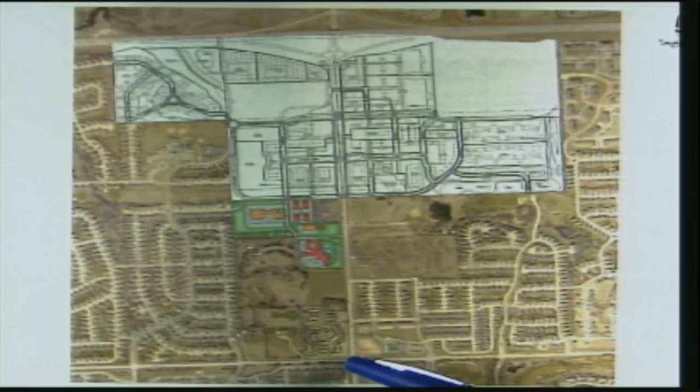Afternoon, Jason Thielen, E&A Consulting Group, 10909 Mill Valley, Suite 100, here on behalf of the applicant. Let's get our bearings here on this project. It's in between a couple major streets, Pacific and Dodge, Pacific being here, Dodge, 192nd Street being the arterial road that we are up against. This location here. If you're familiar with the Avenue 1 project, which is north of us, and which I'll continue to talk about, and then Pacific Renaissance, which is the 12-plex project that's been approved for quite some time on that location, and then the property in between.

And we'll get into all of that as we go through here. Just a little bit of background on this project, I think it's important to at least get you guys up to speed on the amount of time and effort we put in with adjacent property owners as well as with staff and a couple groups looking at this.

I've been working on this project since December of '16 to this present time. We had a client that came in and had put the Nicely property under contract back early in '16. We started talking with them, working with them. Around February of '17, the All Holy Greek Orthodox Church came in and was working on a letter of intent on the Everett piece and asked us to represent them as well. Considering that both pieces are pretty much adjacent to each other, it made a lot of sense for both of those groups to come together.

So from about February on, at that point, we started working together as a group, meeting, talking about the project, trying to make sure everybody's interests were represented. March 2nd of '17, we had our first pre-application meeting with the city and city staff and talked about the project, went back with their input, and started working together as a group.

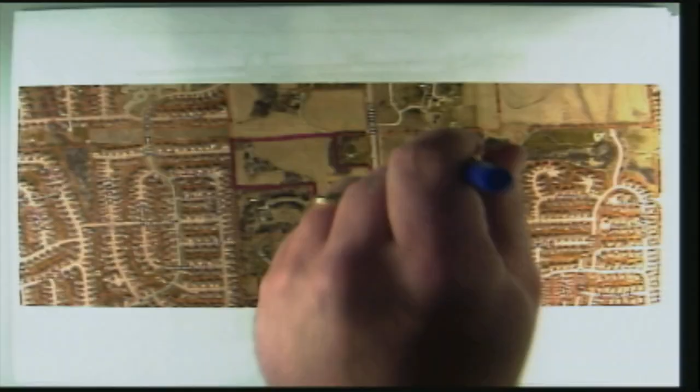The Baker property here, we have been in contact with them. It was since sold. We actually tried to purchase that property three times and were told it was not for sale. We've also talked with Mr. Kurt Hofer, not only a representative of Avenue 1, but also because we have to bring sanitary sewer across his property, so he's in the loop from that standpoint.

We had a neighborhood meeting February 21st of '18, and it was a good meeting. There weren't a lot of neighbors there. There was one representative from the Fire Ridge Homeowners Association, which is here. We continued to talk with him and are working with that neighborhood as well.

So as you can see, a lot of work over a year's worth of work, a lot of constituents, a lot of stakeholders we've been working with at the time to get us to this point where we are today. So we'll get into a little bit of the details of this project.

It's a 21-acre project located at the northwest corner of Gray Plume and 192nd Street. It's a 4-lot preliminary plat, and we're asking for a change of zone from agriculture to DR, R5, and then R6 PUD, which I think you're all familiar with as we bring in higher-density type projects for apartments. There are use permits that go along with this project as well, and I'll talk about those.

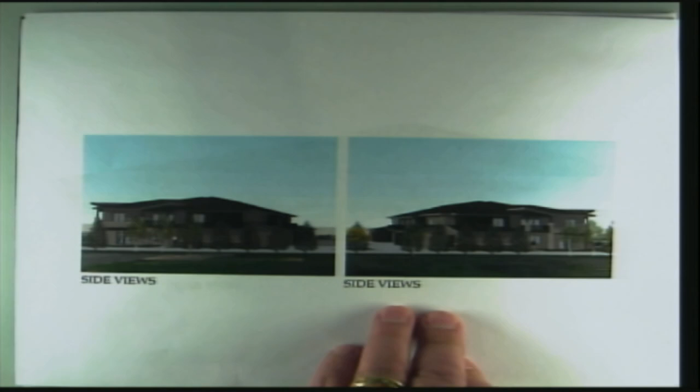The R6 PUD, which is being laid over in the rec report and we're fine with, is at this location here, but I thought I'd at least show you. Those will be 36 units of market rate apartments, 4 nine-plexes. It's a 2-story product with garage underneath. That's at least what's being planned right now. That will be the R6 PUD, so we'll have to meet all of the R5 and R6 site regulations for that project. There's a daycare on this site as well that we have shown.

That daycare is at this location here, 10,000 square feet, and we do have interest from a couple of daycare providers in that 8 to 10,000 square foot range. There's an idea of what this may look like and how that will go forward at that location. That is in the R5 district.

This other component of the project is assisted living and memory care at this location here, kind of south of this private road. I don't have any colored pictures of that, but we have 54 assisted living units at that location—that's the south building—and then there's a memory care component, which is 24 units. The memory care is single story, and the assisted living is a 2-story product. So again, fitting within the R5 zoning district. Memory care, assisted living at that location.

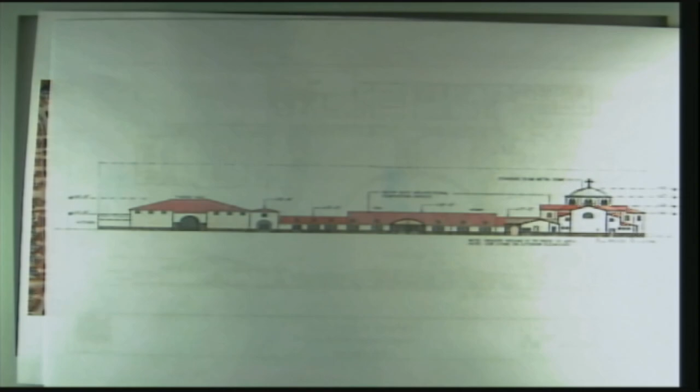And then we have the religious assembly use, which is a conditional use permit, at this location here—32,000 square feet of total building. They'll build it in a couple of phases. They'll build 24,000 square feet to begin with, consisting of the gathering area at this location. So that gives you an idea of the floor plan, what that looked like. This will be a large, open space entranceway into that. We're aware that we'll need to go forward and ask for a waiver to the height for the parapet and the cross, and we'll be prepared to do that as well.

Can I ask a quick question? Is the church going to operate all of these facilities? They will not—they'll operate the religious assembly, obviously, and they'll occupy this location. They do have this property under contract, and they're working with a couple of daycare providers. Okay, that's all, thanks.

I'll leave that one there.

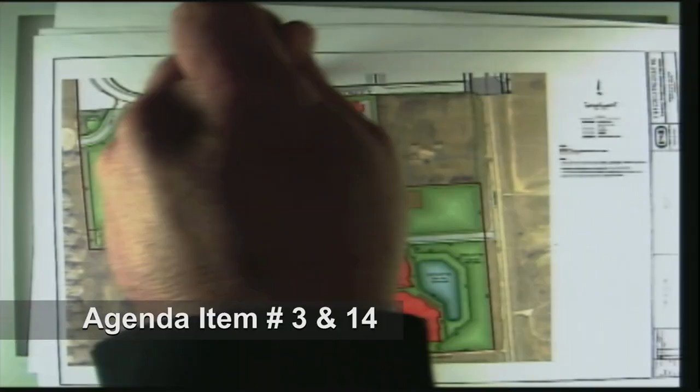So we'll talk about access a little bit. We are kind of fixed on a couple points. The Avenue 1 project has an approved preliminary plat, and this is the location their preliminary plat shows. I talked to Mr. Hofer, and they're not planning on moving that as of now, so we'll match up with whatever that location is. We'll probably be there before them, so I assume that's where that intersection will end up.

And then we have the right-in, right-out, future full movement intersection at 192nd Street, which is the eighth mile location. This road will come down through the project and then stop, as we do not own past that.

We're making a connection to Fire Ridge, which is Street B there. I know this is a concern of the neighborhood. When we met with them at the neighborhood meeting, from our standpoint, we are of the opinion that Harney does create a better access through. People can file out onto HWS Cleveland and use that collector to get locally. We understand why Public Works is requesting it, and we are indifferent from that standpoint on that access.

And then Gray Plume, which is this access here. This exhibit shows it's actually platted, and it actually belongs to Mr. Daly. So whenever this was platted into acreages, he created these fingers, which then became the private drive access point. There is an access easement over that piece of property. It's not shown on our plat because technically we do not own it. However, we do have rights to improve that piece of land if it is to be improved for public purposes. So we are working with Mr. Daly on that. We will have to pay fair market value for his property. It's not like we can take it. So we're working through that with him to get that all finalized as we move forward.

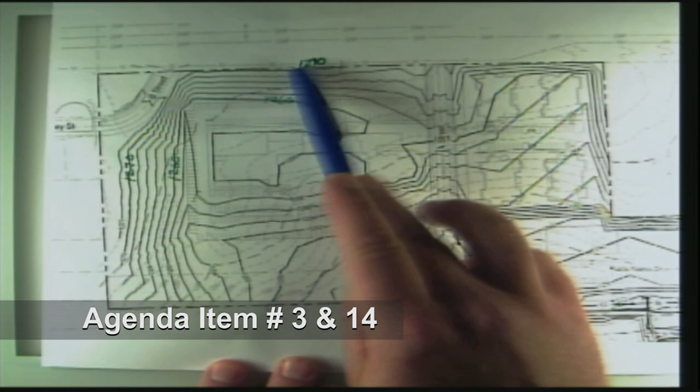We'll continue to work with Public Works on that. I talked about Gray Plume - the conditional use permit for the church talks about providing a sidewalk down from what will be Street B, coming through Fire Ridge down to the church there. As you can see, there's a tremendous amount of grade there - it's a 3-to-1 slope with over 10 feet of fall. Getting a sidewalk there is going to be really expensive, and it's kind of impractical considering what you have to do to get it down there. When Harney Street eventually comes in, they can come around down Street A at a reasonable grade. So we'd ask that not be a condition of approval for that.

We are in agreement with all the other conditions that staff has put out, and we'll continue to work with staff on those. We're consistent with your comp plan and your future land use plan. And with that, I'd be more than happy to answer any questions you have.

Thank you. Okay, are there any other proponents?

Thank you, Mr. Chair. Brent Beller, 11440 West Center Road, appearing on behalf of Jude and Alexis Beller. I have a site plan, but I don't know if it's the most current one.

The Bellers aren't opposed to this development. By and large, they've talked to the church, they've talked to Mr. Thielen, and they understand what's going on. Obviously, Jude's in the development business.

Just to reiterate, their parcel is 10 acres right here. That's their home, where they live. They have 5 kids, and I can tell you from experience, those 5 kids and their family take full use of all 10 acres. It's used as a family residence. With this development, I think they understand everything that's going on.

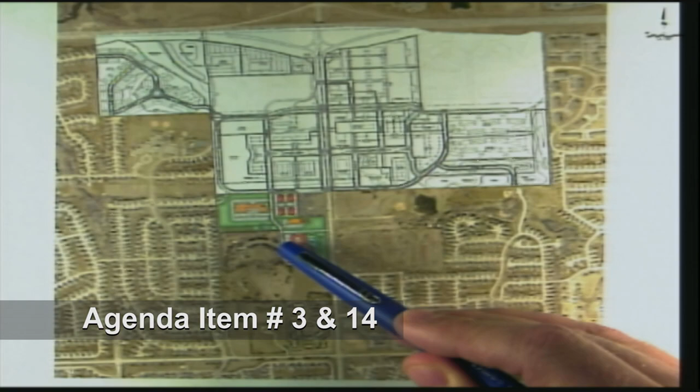The other thing to be mindful of, which is kind of hard to depict on this plan, is that what's been proposed is essentially 4 exit and entry points off of these properties. That's a lot. The thing I know Jason and Jude are talking about is how to handle that.

As they exit here, this is their only exit. If we're doing stuff down here, I think the idea is maybe to close this off, so we want further discussions about, I assume, the rerouting up there. It's those types of things that, as Jude and Alexis look at this from their residential standpoint, they want to make sure they have answers and that they're clear, because again, it's their house.

Now, being in the development business and real estate, they're also mindful of where they're situated in the city of Omaha. We know what's going on up at 192nd with Avenue 1, and that this property sits in an area that's going to be developed. They've accepted that perhaps the time has come that they need to sell their residence.

With that in mind, the second theory in all this, and the thing they want to make sure continues to be discussed, is that they don't want to do anything or agree to anything, especially regarding these entrances and exits onto that street, that would hamper their ability to develop their property. That just hasn't been explored yet. I know Jason has been working with his team to try to figure out solutions for how they can best go about that. To my knowledge, they haven't necessarily agreed on that.

I think there's been informal discussions with the church. Informally, they've agreed, absolutely, they'll work with them. But again, we're just here to put it on the record formally that we hope those discussions continue even after, assuming you all approve this, as we work towards city council. So with that, I'm happy to answer any questions, and we appreciate your time.

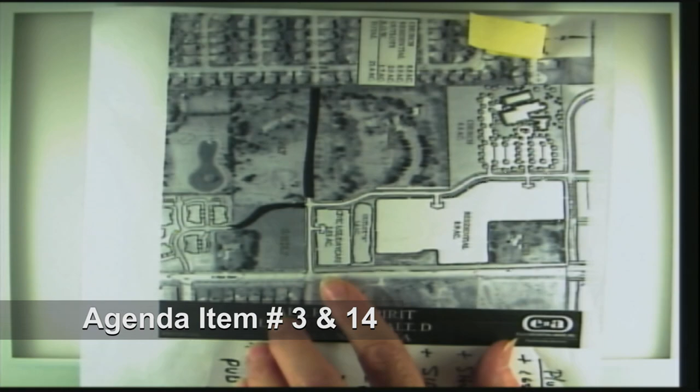So this here is the back end. Will it work if you turn that? Sure, or this way? Is that better? There you go, that's fine. Please help me. Thank you, you bet.

This is 190 - no, I turned it. 190, yeah, this one's right, 192nd Street. 192nd goes north and south. Okay.

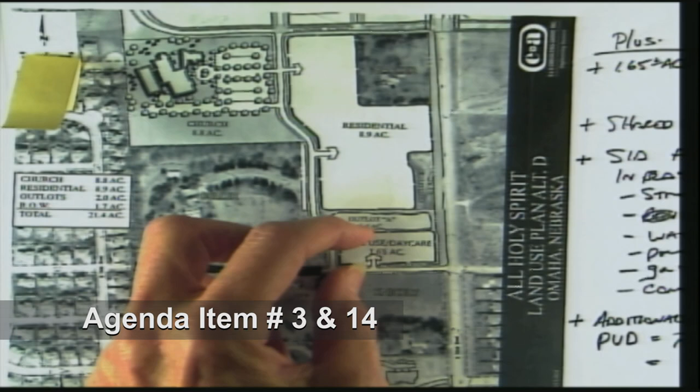Then this is actually the quarter-mile access of Leavenworth, which goes onto our property. As you can see, E&A suggested that we go straight through here, and that then we would have about an acre and a half or plus of extra land to the north of our property that would be sectioned off from the rest of our property. So we didn't know how we'd be able to use that. They suggested putting a daycare in there, and we thought, well, with that potential, maybe that would work for us.

But at that time, we weren't able to do anything. We didn't have any potential buyers. So then over the next several months, until about this past January, our resources changed, and it became apparent that we might have an opportunity to work with them again. So we contacted them in January and asked if we might be able to work together.

They were hesitant, and we pressed them. We said, can't you maybe just come up with some action points that we could address and maybe make this work so we could both get this development going. So we had a letter that shows some of our action points.

We were in discussion with them, and at one point we were submitting a potential site plan to the city planner's office, and they said, well, let's see what your site plan is, we want to know if it's going to meet our road needs. So we submitted it to them. That site plan was not approved, so we weren't able to move forward with that connection.

But in the process, we also asked them for their site plan. In their site plan, we assumed it was going to be similar to what they showed us before, where the church was up there and designated residential. They showed us nothing but the church. So at that time, we thought, oh, okay.

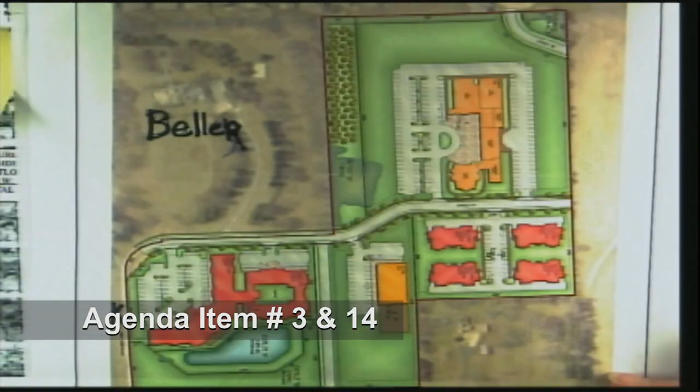Well, on February 13th, they invited us to a meeting, which they were required to do. They had submitted their plan to the city, which is now the plan that you are being presented. Do I have that in the right orientation? There you go. Okay, thank you.

And in that, it showed that they were now taking a daycare and an assisted living, which we had originally planned to put on our property, which would then carry the cost of infrastructure. When this was presented, we were a little bit in shock because we didn't realize that they were going to take those uses after having taken our assisted living people before. Apparently this was kind of their MO.

So we said, well, are you interested in working on a road development for the quarter mile? And they said, nope. Then they said, do you have any other questions? And we said, I guess not. So we walked away from that meeting. They proceeded to give us notice of other meetings that they had with this plan. We did not attend because we really didn't have anything else to add. Since we weren't going to be able to participate, I didn't want to do any cooperative deal, so we did not join in their conversation.

So at this point then, let me make sure I get the orientation right.

We have 6.7 acres, which becomes problematic for these smaller pieces, similar to the Bellers and the Dailies. When you have to carry the cost of infrastructure, it almost devalues your land. We have a 3,200 square foot ranch on 7 acres on 192nd Pacific, which is pretty valuable. So in order to improve that, we need a higher density or something that's going to carry the cost of that infrastructure in order to make the roads come through.

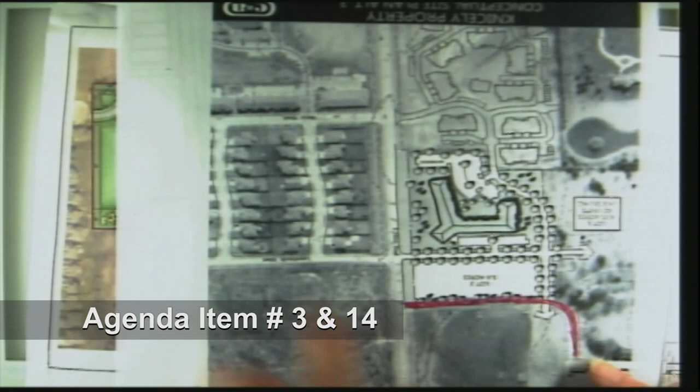So at this time, this was their plan. Again, I got to get this in the right orientation. No, yeah, so 190 here. Is this right? 190, oh, we want to go north. Yep, there you go, there we go.

So this was our assisted living and our 2 acres for potential daycare use, and the road, as they were suggesting, coming straight through. The other thing that's problematic is the Pacific Renaissance designed a road that came halfway through our property and did not connect to the Daily property, which they abut to. At that time, we didn't understand that was going to be a problem, and I was out of town at that meeting, so I didn't have a chance to ask why they don't just go ahead and connect there.

My contention is it's more cost effective if the two of us share the cost of the infrastructure with a shared road. So at this point, with the road coming through our property and then connecting to theirs, which is their proposition, we don't have shared cost and are unable to proceed with a development.

So in this case, if we're going to develop a property, this is the Knicely property, this is the Daly property, this is the Beller property, this is the Everett property. The Everett property is 20 plus acres, these are all 10-acre pieces, and ours is less than 10 acres. This is Grayfawn Avenue and 192nd Avenue, existing roads that the Everetts have an easement to that gives them the right to improve, and we actually don't have rights to that road.

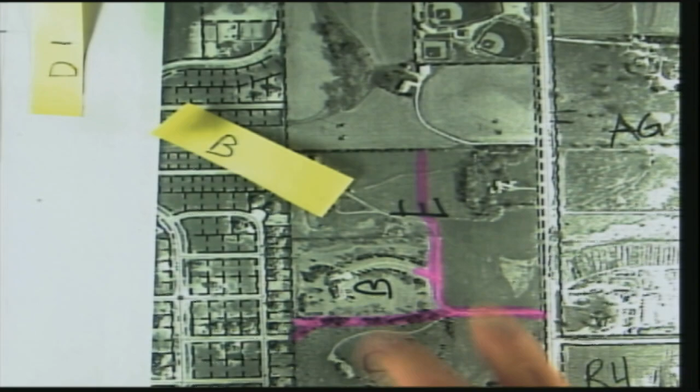It's a private road. So with that being a private road, my perspective is it makes more sense for these people to be able to improve, as the Bellers were saying, that they need a heavier use or somebody that's going to bring in water and sewer, as this demonstrates.

Get us going the right perspective. There you go, there we go. Can you guys see that? Okay, whoa, do left here. All right, this is how the land flows.

So the water runoff goes towards this direction, down to this detention pond that they're proposing, and also their wetlands. So for the Bellers and the Dalys to be able to connect to sewer and have storm drainage, they need to be coming this direction. So without the improvement of Grayfawn, these folks don't have opportunity to connect to sewer and water.

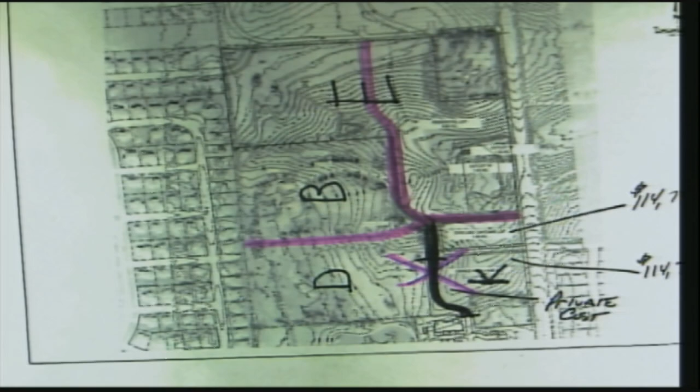The 8th mile connection that they're proposing is also a private road, so it does not carry the same weight of bringing in the infrastructure to this heavy use development. So the heavy use of this is a concern without having infrastructure. The fact that it blocks off the ability for Fire Ridge to access through a couple of points here, it would come through the Daly property.

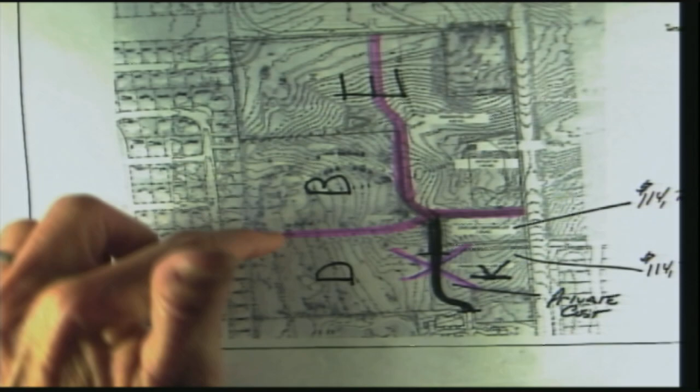My proposition would be that they would share a road between the Daly and the Bellers, whether they want to develop this year or 50 years from now. This is going to be a less expensive shared cost. But again, there needs to be water and sewer because you can't go uphill into Fire Ridge to connect to that.

I guess my concern today is that this hasn't been significantly addressed, the Grayfawn Road issue. I think that needs to be resolved before there's any approval on density, any changes to the conditional uses. I just don't think it's been addressed sufficiently to carry what needs to be done for future development in this area.

The issue of sidewalks and all of that related to these roads, none of that has been addressed. A buffer between their property and our property has not been addressed. When they said they didn't want to work with us anymore, we didn't feel like there was an opportunity for conversation, that they just kind of said, nope, we're done. The city's not going to require us to do anything else, so we're not going to.

So that's why we have a zoning board, because you folks have an ability to come in and see a vision bigger than what the city's committed to in municipal code and the master plan, and their hands are tied to some degree because of that. So if you want an exception to that, we have to appeal to you folks.

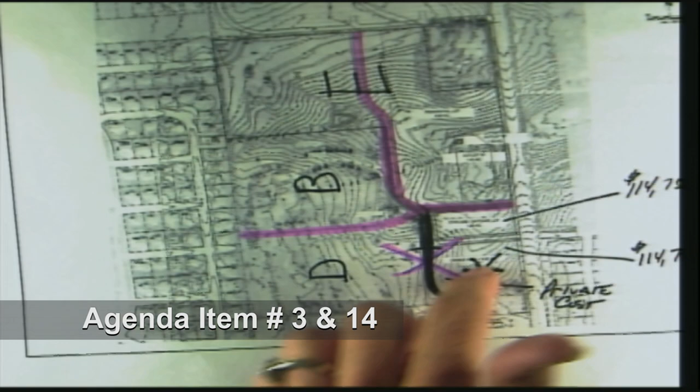One thing I recognize is Leavenworth is actually the quarter mile, and these two streets don't meet. I know there are several places in Omaha where they don't meet. It's not ideal, it's not the best, but if these people are improving and this doesn't get improved, you're leaving all these people hanging. I don't think that's a good plan for the overall development picture of that area.

I think that's all I've got. I appreciate your time, thank you for letting me speak today. Okay, thank you, Susan. Are there any other opponents?

Hello, my name's James Dean, 503 South 195th Street. I'm a resident in Fire Ridge and also on the Fire Ridge HOA board. Not sure exactly how this works. I'm also here with a fellow neighbor, Dan Hartman, who asked us to kind of combine, so.

Just looking at this property, James, do you want to give that a turn? Is that better? Okay, just to show you where my residence is right here. That backs up to the property, and Mr. Hartman's is right next to mine. We do have a tree row there. On this tree row, there's probably 10 to 12 large trees that are dead out of 30 or 40.

These have not been removed, have not been maintained over the years, and it's just become an area for trash to collect with the wind. It's actually on Mr. Everett's property, but it backs up to our yards. We have restrictions with our covenants on fencing, so even with fencing, it would just collect trash.

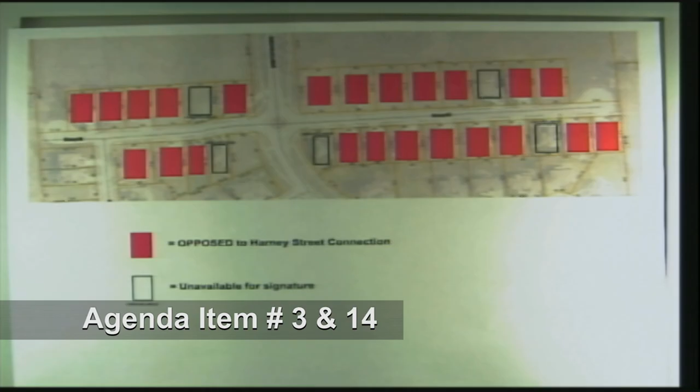The red boxes represent homeowners on Harney Street. The red shaded ones represent homeowners opposed to the Harney Street connection—again, not opposing what the church is doing, just opposing the Harney Street connection. Hopefully you received that letter. We also started a petition—I've got 2.5 pages of folks on Harney Street who signed opposing it. I submitted them to Mike.

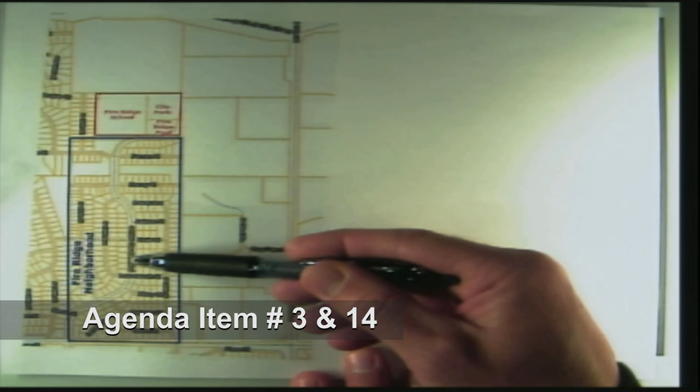Here's the blue box representing the Fire Ridge neighborhood. On the very north side you have the Fire Ridge School, a city park, and the Fire Ridge clubhouse with a pool, tennis courts, and basketball courts. Neighborhood pedestrian traffic follows HWS Boulevard to the north. Our concern is that adding more traffic to Harney Street will congest that—actually we feel it's a safety issue, adding more traffic, with school children going to the school, pool, tennis courts, and other recreational areas.

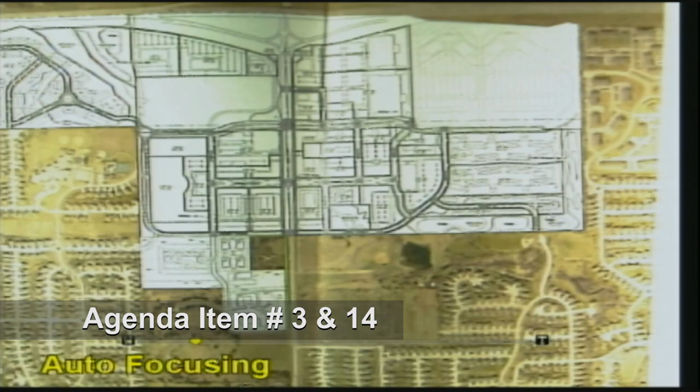Right in this area we have a tree buffer zone today, and we'd like to be good neighbors with the church—if that tree buffer could remain in place and not install the connection, that would keep the parking lot lights and traffic from the church from coming through. So that's our request, and opposition to connecting Harney Street. Like Dan mentioned, some of these other connections make a lot more sense—HWS Boulevard comes through with a calming device, but some of these other connections, including the Harney connection, don't show any type of roundabout like was included with the Avenue 1 project.

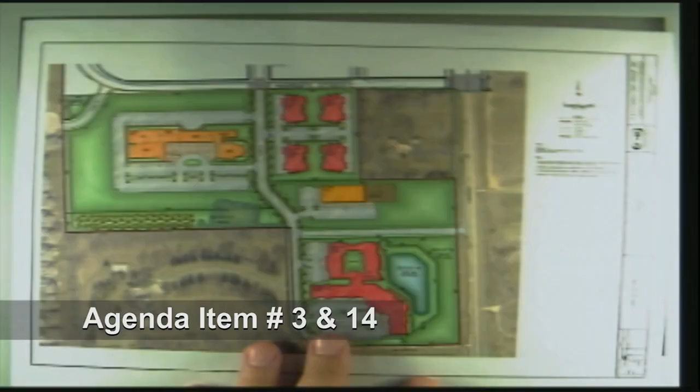I think I'll start with the homeowners and the buffer yard, and I'll get to Mrs. Nicely. So at the homeowners association meeting, the trees were brought up along that property line, and at that time we said we would work with them. The intent was to try not to remove any of that natural tree canopy, I'm sure they're probably all volunteers over the years, as many trees as possible during the grading process. So we'll continue to work with them.

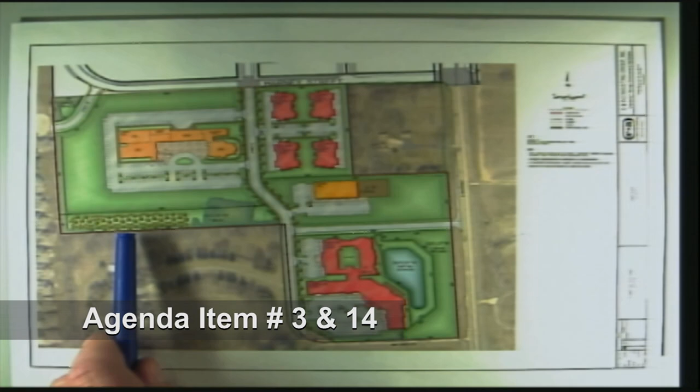The trees you see here aren't a requirement of a buffer yard. Buffer yard is really space, landscaping isn't required within the code, but we do have a mitigation component of this project. There's actually quite a bit of trees, natural canopy, located on the site, and that's why you see this location. As a matter of fact, in our discussions with Mr. Beller, he'd actually like to see those trees moved over and up against the northern part of our property, as it would open up other opportunities for development down the road.

It has to be located within an outlot, and we do have to try to recreate canopy, so I can't just individually plant trees and meet that code requirement, but we can probably work on putting groups of trees in that area and use that as mitigation. So I think that's an easy fix, and something we did discuss at that neighborhood meeting as well.

Parking lot distance is about 150 feet as well, and if I go back to the grade, it sits pretty low, again 10 to 12 feet down from the property line. So there isn't a terrible lot of room for expansion, and as you can see, that is all slope at that location, so they would have to push that back and put a retaining wall in.

As my understanding is, as I advise all my clients when we do use permits, we put our maximum amount of building square footage on that property, so if we want to come back and do additions, we can without having to come back in front of the public body for approval. This is the maximum that this facility will be, to my knowledge, at this time. It doesn't mean it won't change down the road, but hey, what do I know?

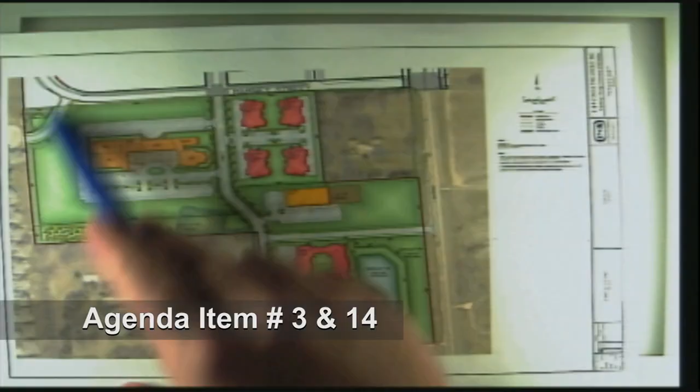So trees on the access here, I'm sure Mr. Haas will probably not be okay with an L or a 90-degree access, and we do need to come in radial to that curve. We completely understand where the neighbors are coming from. We would support that decision if that was something the board decided, to not have us make that connection as well.

Okay, to address this, Nicely, I went through the time frame for you all up front for specifically this purpose, to show you the amount of time and effort that was put in place with the Niceleys involved in that project all the way up to August of last year, roughly.

To suggest that we stole uses, or that we didn't work with them, or that we didn't try to help them, it frustrates me from the standpoint of being involved in the process the whole time. The discussions really broke down from the standpoint when the crux of the issue for her property is not us.

Oops, I got my note wrong there.

It's twofold. As we all know, if you bring in a piece of property all by yourself with no one to help you, you have to put in infrastructure. That's not uncommon for any developer that comes before you on any project. To suggest they shouldn't have any costs associated with that—I'd love to have that option, but we don't have that option as developers. It's part of the deal.

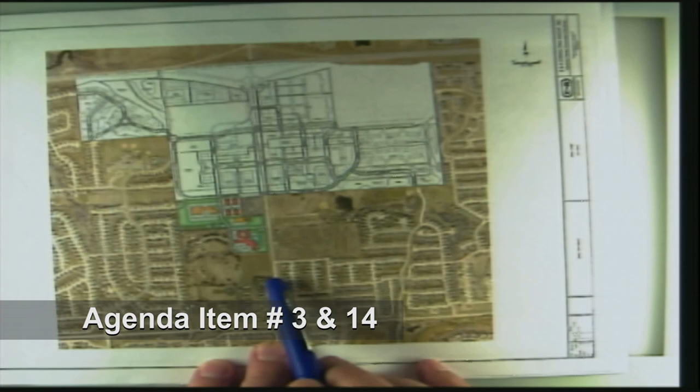The crux of the issue was twofold. One, Leavenworth has to come through. The city will not allow Gray Plume to be an access point, specifically because you'd have opposing left turns. If a car is coming in wanting to turn at Gray Plume, and another car wants to take a left onto Leavenworth, they meet in the middle head-on. I don't think the city or anyone wants head-on collisions at that location. That's why Gray Plume will eventually go away, and why they limit access points—quarters and halves, right-in right-outs at the eighths—on arterial roads. It's just too much of a traffic danger with left turns.

So that's not an option for us. Two, Leavenworth needs to match up to this location. Again, that would shove all the infrastructure costs onto everybody else. We'd love not to have to take on those responsibilities too, as developers, but it's just not part of the deal.

Swinging that road down still doesn't change the fact that this road has to come through some way, shape, or form. There was a public hearing on Pacific Renaissance, approved four times at four public hearings for preliminary and final plat. That road location could have been discussed—my understanding is it was discussed at the time, and that's where it ended up. It is not going to be moved.

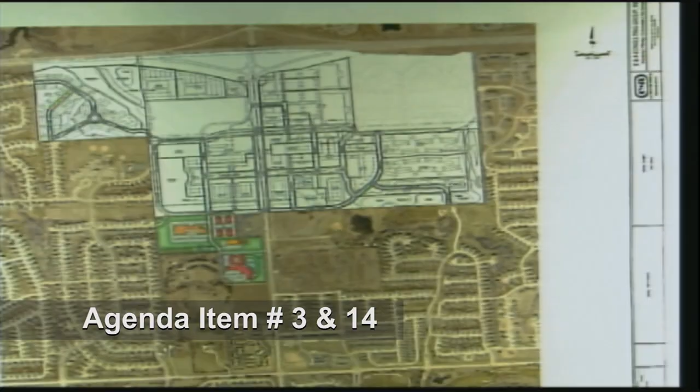Okay, thanks. You bet. Somebody over there had a question. Go ahead, you got to come up. You want to call them up? I called them up. All right, I seconded it.

David Skabinski, 19516 Harney Street. Thank you. It was either Dan Bodis or I that brought this up, but you might zoom in.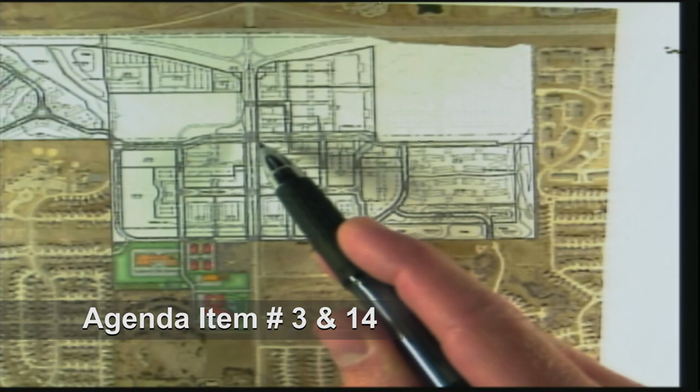This is HWS Cleveland Boulevard, and as you follow this through the neighborhood, this would be Pacific Street, and this is the entrance into the neighborhood currently. It goes through the entire neighborhood and then pops out through here, goes through the roundabout, and then enters into the Avenue 1 project, continuing on to exit onto 192nd Street.

To me, that makes a lot of sense. It starts from one end of the neighborhood, goes all the way through, and then exits out, instead of adding these extra pieces of cross traffic.

David? Yes. Just to make a point on the connections there on Harney, at the east end of Harney, that's been a stub street with a temporary turnaround ever since the development was developed, Fire Ridge was developed.

That was always intended to be a connection street. The only reason I'm bringing that up is we run into this quite a bit when we're talking about new developments or SIDs coming on board with another SID and interconnection. And it's tough to build a city when we don't connect our neighborhoods. Otherwise, we've got everybody out on a collector street, and you'd have too much traffic. So that was always there, and it should never have been a surprise to you that someday that was going to go through.

I understand your point. Okay, the only thing is, to the east of us, if it would have been another neighborhood that we tied into with residential, but this way we have it tying into commercial. Gotcha. Well, yeah, I understand your point, but okay. Thanks.

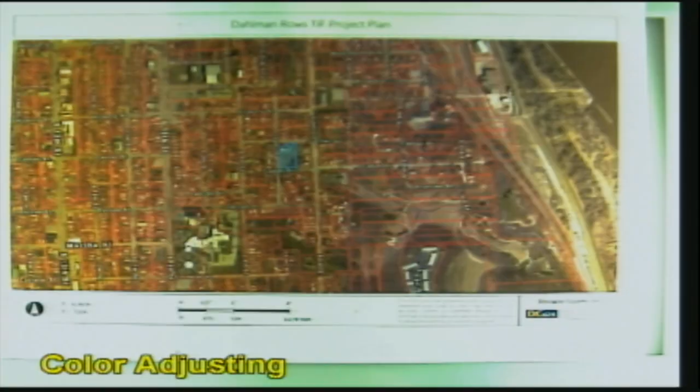Yeah, Don Seaton, Omaha City Planning. We'll start with identifying the site and getting oriented. This is the Dahlman Rows project, redevelopment of a site that's just a little over 1 acre, about 2 blocks south of Dahlman Park.

The project involves the development of 30 for-sale market units. These are row house units, a mix of 2 and 3 bedroom units arranged in 8 structures. So seven are 4 units attached, and this is a 2-unit structure. The owner developer is Dahlman Rows LLC, and Benjamin Catt is the managing member.

I indicated this was a vacant parcel. This is what it looked like about a year and a half, maybe 2 years ago—kind of weedy, overgrown, neglected. It had been a commercial floral shop and greenhouse land use. The greenhouses were in pretty poor shape. The site's been cleared since then, but it's been underutilized for a while.

Redevelopment really is good as a TIF project, I believe, for this site. The proponents have worked well with the neighborhood. They've had a couple of meetings, reached out to the neighborhood, and modified the design of the project based on neighborhood input. They've also worked really closely with the city's urban design staff.

Going back to that site plan for a moment, I would note that a fairly substantial amount of public improvements are involved in this project. The main utility lines under Cedar and Center Street will be connected with a trunk line or main line going through the site. In addition, Cedar Street is presently a gravel street—it will be reconstructed to city standards. So there's a fairly substantial amount of public improvements involved in this project.

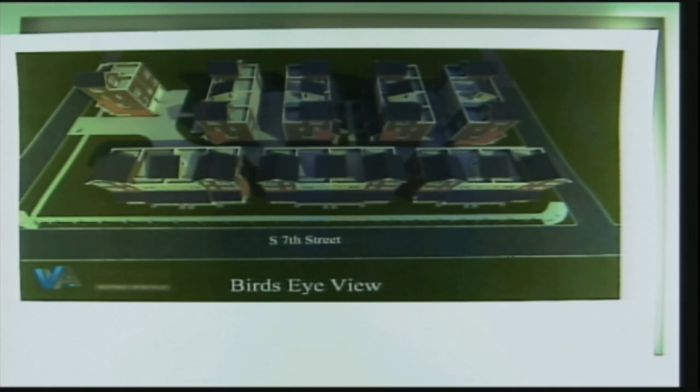The design has been evolving a little bit as we've gone through the TIF process, but that's a good thing because, like I said, they've been working with the city and the neighbors. That gives you one perspective—this is more of an oblique aerial perspective. But anyway, the project is a $10.3 million investment. The TIF support requested is $1,750,000. The project is consistent with the city master plan and meets the criteria and requirements of the TIF program. We ask for your approval.

Any questions? Yes, just a question or two. In the renderings, it appears that every unit has garages for parking, correct? Yes, parking is on the lower level. That would probably limit the on-street parking as a result of having the garage units. Correct. Okay, because that's an awful lot of homes. It's a fairly high-density project in that older neighborhood. That's also a site that's zoned general commercial—there are other uses that could go in there by right that would be more problematic. Yeah, it's a great project for that area. I just want to make sure there was going to be adequate parking. Adequate parking.

Okay, thank you, Don. Just want to remind the people that came here and requested this agenda item, the Dahlman Rows—agenda item number 10 was on for approval, but that's been taken off, and you'll have time to come up and give your concerns, support, or opposition at that time. But this is for the TIF financing right now. Number 10 will be taken in its regular order on the agenda. Okay, are there any other proponents?

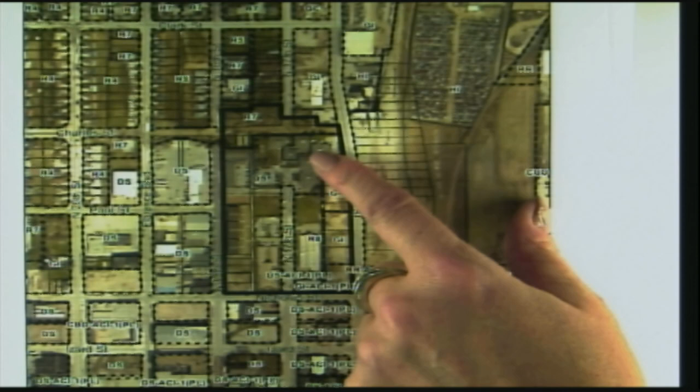Good afternoon, Jennifer Taylor, City Law Department. What you have before you today is actually the second amendment to the Campus for Hope redevelopment plan. The original redevelopment plan was originally approved in 1995 and facilitated the construction of several buildings in the north part of the redevelopment area. The redevelopment area that is the subject of this plan goes from 16th Street on the east here to 18th Street on the west, what we refer to as the Kellom Greenbelt on the north end of the property, and Nicholas Street on the south.

The plan was then further amended in 2008 to facilitate some additional buildings that were constructed to support the Siena Francis Shelter and the services they provide. This amendment before you today will continue those efforts.

The location of the project that's before you today, or the projects that are part of the subject of this amendment, are mostly along the east and southern end of the redevelopment area along 16th and Nicholas. The current uses in the area are the Bright Shelter, which is where the Siena Francis House houses their men's emergency overnight shelter, as well as some various administrative medical facilities.

Then there's also at 1702 Nicholas, the original shelter building, which houses the emergency overnight shelter for women and the men's and women's recovery program. There's also a small building here at 1624 Nicholas that I think you guys may have driven by today, and that houses the current day shelter services provided by Siena Francis House.

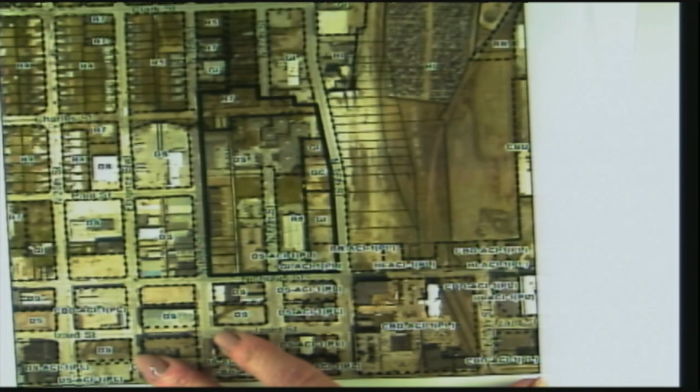What the plan amendment before you proposes are essentially 5 different projects, a number of which will be undertaken by the city, and the major construction project will be undertaken by the Omaha Shelter for Homeless Trust, which is fundraising up to $15 million to construct a 43,000 square foot facility in roughly this kind of northeast section of the property.

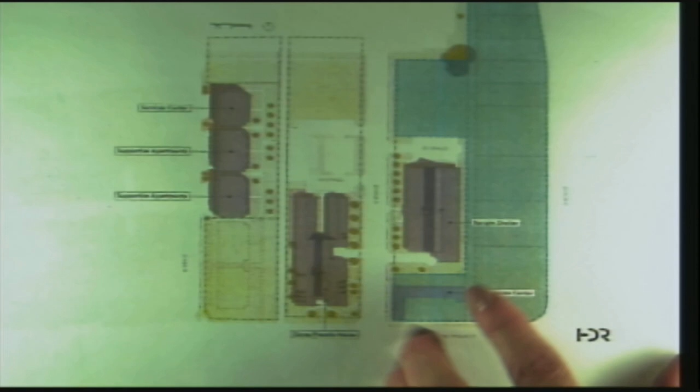This plan amendment will allow the city of Omaha to participate in this project in a number of ways. First and foremost, the city will undertake remediation of the property along 16th Street on the east side of the redevelopment area. This used to house a salvage yard, which has since been relocated, and all of the structures on that site have been removed. However, some environmental remediation and site preparation work still needs to be done. The city will undertake that, as well as demolition of the existing day services building at 1624 Nicholas.

The city will also install streetscaping all along Nicholas and 16th Street. We also propose to, in the future, demolish the shelter building at 1702 Nicholas to further make way for future development. This will not occur until the new building is ready and this site has been vacated, and Siena Francis House tells us they are ready to have us take that building down. Once all of the site preparation work is done by the city, a new shelter building will be constructed.

Let's see, here we go, 16th Street. At this location on the site, just north of the Bright Shelter, along 16th Street, in the place where the salvage yard used to exist.

In addition to undertaking the various things that the city will do, the city will also vacate two alleys that you'll notice come right through here. Siena Francis House actually owns all the property on which this project will be built, so the city doesn't need to acquire any property. This is going to be done in cooperation with Siena Francis House and the Omaha Shelter for Homeless Trust. Does that include the property that you said needs to be remediated?

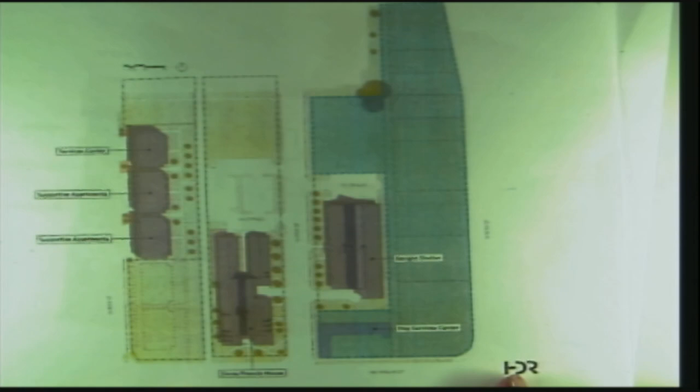Yes, the remediation property is actually going to be the site of the new shelter. So this area in blue right along here is all going to be remediated by the city. There are representatives here from Omaha Shelter for Homeless Trust if you have any questions. Otherwise, I'm happy to answer anything I can.

Okay, thank you, Jennifer. Are there any other proponents that wish to speak?

David Lemke, architect with HDR, 8404 Indian Hills Drive. I'm here to answer any questions you might have.

Catherine French with Lamson, Dugan and Murray, 10306 Regency Parkway Drive. We are the legal counsel for Omaha Shelter for Homeless Trust, available to answer any questions if you have any.

Okay, thank you. Any other proponents? Are there any opponents? Okay, we're going to close the public hearing. Does the board have any questions or comments?

I just have a question to whoever might answer it: what about the timing of the projects? Jennifer Taylor, City Law Department. The city will actually undertake the demolition of the day services building within the next couple of months, and we will also commence and likely complete the remediation work by, I think, August, September, October of this year. And then the construction of the new facility can commence after that. But that will also be contingent on raising all of the necessary funds to construct the building.

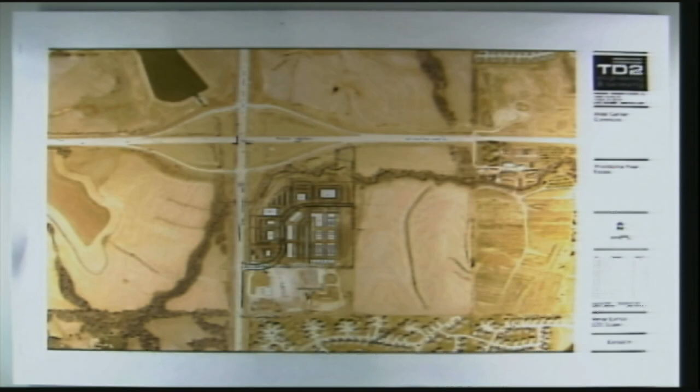So the acreage is about 36.51 acres. The usable portion is about 23.87 acres, and there's about 3.35 acres of outlots, with the rest being dedicated right-of-way. There are also 3 outlots.

Zoom in a little bit. There are 3 outlots here. Outlot A is a drainage way and green space. Outlot B is a roadway on the south side that runs between the east side of the property and the west side of the property. This will be a dedicated right-of-way down the road.

So there will be a revised preliminary plat with the final plat that shows this is going to be a publicly dedicated right-of-way, providing access to the east and south of the proposed development. And then there's Outlot C, which is a detention basin that also provides access to Outlot A, the drainage way.

The rezoning is from AG to mixed use. This is at the intersection of 204th and West Center Road, a 165-acre mixed-use center. This is one of the largest mixed-use centers under our master plan, the second largest.

We will be creating 8 developable lots, going in order from Lot 1, which is a proposed C-store. Lots 2, 3, and 4 are proposed retail uses. Lot 5 is shown to be a 20,000 square foot office building with 10,000 square foot floor plates.

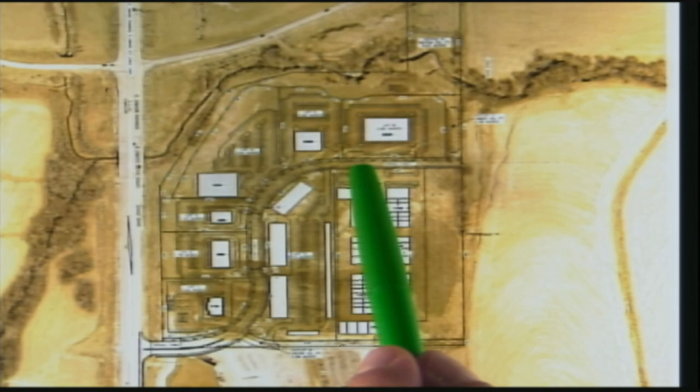Here on the west and north side, there'll be all the things that come with mixed use: street trees, decorative fixtures for street lighting, and pedestrian crosswalks in two different locations here and here. And this is your grouping of buildings in the plaza space.

As far as access, this is a state highway, Highway 31. It has controlled access from West Center Road until the third mile. Typically you have access at the quarter mile with full movement, but in this particular case, you have controlled access.

This is the only opportunity for access to this property at this location, and to the east as you go to 204th Street. The reason is the required distance from the on and off ramps of West Center Road, so you can't have a quarter mile full-movement access—you have to have the third mile access point for full movement because of the controlled access on the state highway.

A traffic study has been completed, which shows there'll be a traffic signal day one at this intersection. There are two inbound lanes off southbound 204th Street and three outbound lanes onto 204th Street. The southbound left turn lane will have an extended left turn movement per the traffic study, and there will be a northbound dedicated right turn lane into what's referred to as Haskell Street.

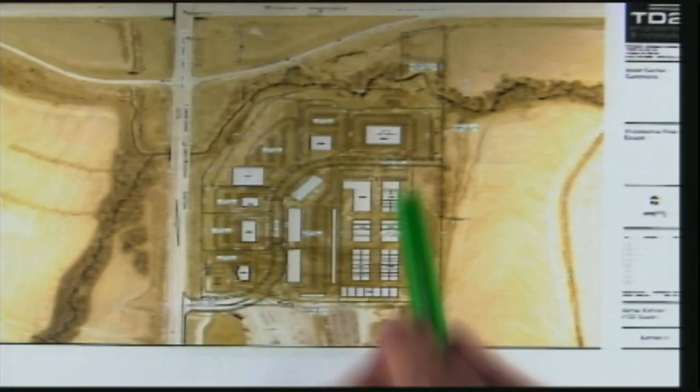When you said day one, does that mean when the building starts, for the street light or traffic signal, or does that mean when you have so many tenants in or spoken for? My understanding is it'll be right away, with the original improvements. In our subdivision agreements, that calls for all public improvements to be put in within two years after the recording of the final plat—that would be one of those improvements. But my understanding is before there'd be a certificate of occupancy here, that signal would have to be installed.

I'm not familiar with the use of lot 7. Could you explain that, please? Lot 7, yeah, that's the car condominium use.

There are 69 individual garages, all with restrooms, where you can go store your high-end cars. Each unit is about $180,000 just to store your car there. There's a clubhouse where whoever has their car in a garage can come in and hang out—it's really just kind of a man cave, but a place to be with other car enthusiasts and have a spot for your cars and hang out.

Do people work on their cars there? No. Okay, so it's not like an automobile garage for repairs and service—it's strictly for storage and showing your car and a place to hang out.

How many cars can you fit in one of those? That's a good question—I saw the prospectus, it's about 850 square feet for most of it, so 2 to 3 cars from what I understand. You could probably put a lift in there, I'd assume. So, 60,000 a car. Yeah. Okay.

So the road as proposed, I don't know if we can zoom in a little bit. Tried to do the best handwritten sketch alternative to what was proposed. But essentially the

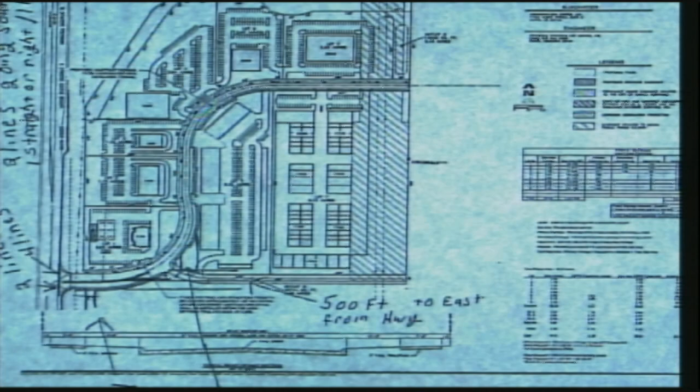problem will be as a semi comes in off of 204th, you're going to have to make a turn, and then right here at kind of the perpendicular part to this curve, make another turn again, and then turn again. That's just probably a bit too tight and just not feasible for the size of deliveries, and these are deliveries

coming in as well as deliveries that the Rock Place has going out to various customers to make large deliveries. What this shows, and this isn't a very good drawing, but we're looking to the east when we're looking at, you're actually, let's see if I can align this properly. So here, this would be going to the, with 204th Street here, going to the north. The top would be north.

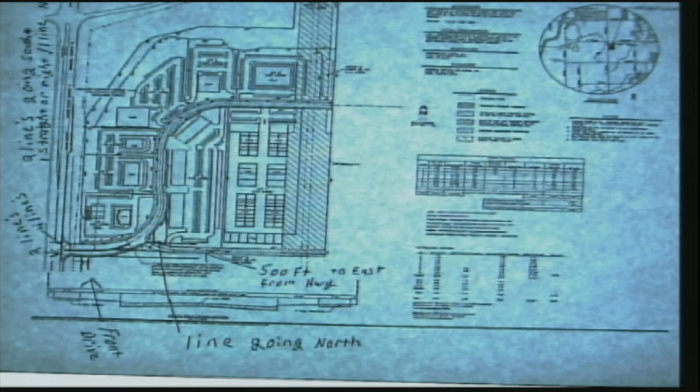Thank you for asking. That was what I was going to get to here. So instead of coming in and making this kind of oddball turn and then turn and then turn again, what we're suggesting is that this comes straight back, very much like what now is in place for the delivery trucks,

and that would allow adequate turning space and turning radius, and they wouldn't have to navigate through this kind of oddball snake-like turn here. It would come straight back, and then traffic going into the West Center Commons development would have more of a 90-degree turn here versus this curve. Delivery trucks could come back.

This road that's currently in place here would remain, and there would be a break, kind of a median break off of the entrance road. There is a median proposed right now.

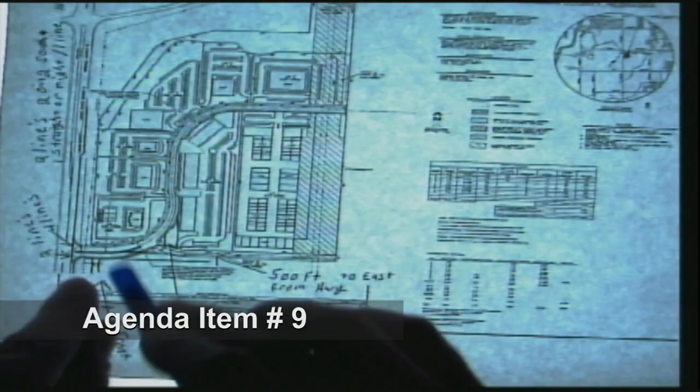What we would suggest is that remain for traffic leaving the Rock Place. That would be traffic coming in from the Rock Place, and then as it leaves, this would remain, and then there would be another road that comes in here, connecting up here. Essentially what you've done is allow the delivery trucks to make safe navigation back to that storage area where they need to load and unload, and you've also allowed traffic to be diverted away from that truck traffic.

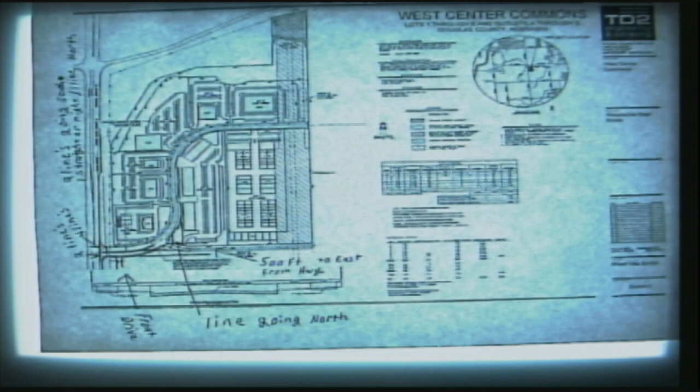The concern is if you get semis in here, more than one, maybe two or three at a time, and you have customers at both the Rock Place or West Center Commons, and you get semis caught in here, if we're going to have a light here, we'll have a lot of congestion. And to make this turn is just simply not safe for those delivery trucks.

Would your proposed road be on your land or their land, or both? Maybe you could speak to the actual border of that. I think it would essentially be right where this is coming in, marrying up to 204th now. It would come back, and maybe you can speak to where that line is exactly.

And then the other part you kind of brushed on, when customer cars, not the trucks, leave, they're going to be pushed back to the east a little bit so they can get out to take a left in order to get to Center Street or 204th Street. So they're not going to have, because that'll be a median, right? So they're going to have to move a little bit to the east to get out? That's correct.

I'm going to call Ryan up, not right now, but could you put that diagram back up again? If we left the design - Ryan's with the city - if we left the curve in there, that design, but where you turn into the rock, if we flatten it, and I'll have to ask Ryan if we can do that, if that was flattened, the south side of that street, that curb, where it'd almost be a little wider and make an ingress for you, what would that do for you?

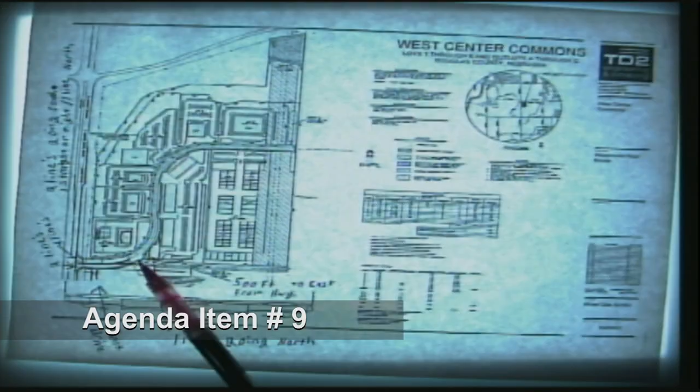Really, nothing's nailed down at this time. It's going to depend on not just what the applicant's needs are and what the operations of the Rock Place are, but also what the traffic study tells us long-term, is this even an appropriate configuration for this intersection? Do we straighten it out so that this, generally east-west, maybe that's the major movement, and this tees in there? What's the traffic control there? Is it an all-way stop, a roundabout, a signal? We want to set it up where it's going to work now and in the future, where we don't have to go back and tear anything out.

I can't really offer a lot of answers as far as how this is going to end up. We have a lot of issues to work through, but we're comfortable with the conditions we laid out, that we can continue to work and land there ultimately when the final plat comes back.

I would think you're going to want some sort of a stop sign at that dissecting, intersecting point there somehow. You've got traffic coming from both ways and semis. Yeah, we'll have to use the traffic study as one of the things to answer that question as far as traffic control.

Okay. Can I bring Larry up? He looks like he's ready to jump out of his seat.

Can I make one more point of clarification, just to clarify something Larry touched on as far as the traffic signalization out here.

The intersection is ultimately under NDOT's control, the State Department of Transportation. They generally don't permit activating signals until the signal warrants are met. So there's the potential where maybe the poles go up, but the signals themselves—red, yellow, green—you don't see those until sometime after, as traffic begins to increase and the subdivision builds out. So it may not necessarily be on day one. There may be some delay. That's happened elsewhere on this corridor, but just a point of clarification on the signalization.

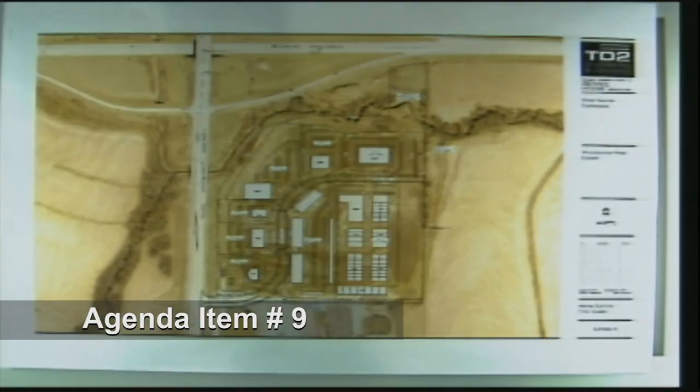So currently we're showing this roadway along the south as being 50 feet—well, right now it's an outlot. We understand we're going to come back and publicly dedicate the right-of-way with the revised preliminary and final plat down the road. Currently, we're showing it as a 50-foot publicly dedicated right-of-way, of which 25 feet is on the north side of the property line and 25 feet is on the south side of the property line.

We're willing to do either. If they would like the alignment to be half and half, we're okay with that. If we need to push 100% of the right-of-way onto the property to the north, we're willing to do that as well. So I think with the alignment of this particular intersection and this roadway, we can work with the property owner to the south and come up with the most appropriate alignment of the right-of-way itself, as well as the configuration of this intersection.

But I agree with Ryan that the right-in, right-out configuration or access for customers will still exist, so people can make that right turn in and right turn out. And again, to reiterate, they can access this public street that will be paved in this location at their choice, wherever they want to access that public road. So they're actually getting a benefit by this public road being in there, eventually a traffic signal here as well. But we do understand they're concerned about truck traffic and radiuses, and there may be a solution where we widen this here to make sure it meets all the truck radius requirements so they can make a safe movement. So we're willing to work with them, willing to work with Ryan moving forward before we come back to you with a revised preliminary and final plat.

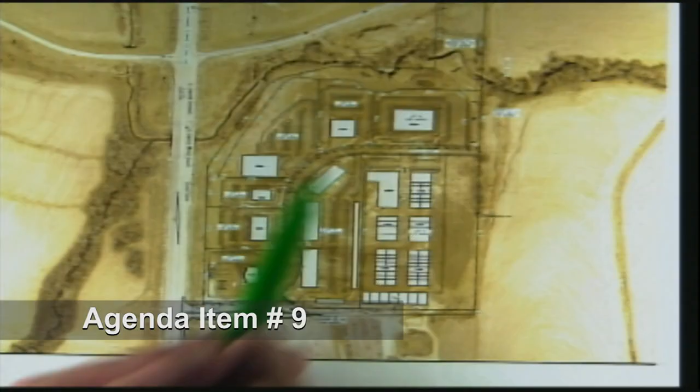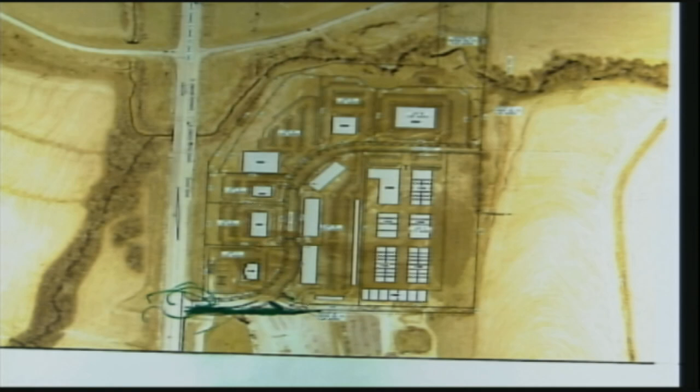My understanding is that it would require us to use much more of their property to make that happen, because otherwise you'd have to come back this way and taper it back in. So I guess we can talk about that. I think from a mixed-use perspective, with the proposed development, we like this entryway in—more of a softer edge coming in, from an aesthetic point of view, not necessarily functional, but maybe functional too. Jeff Elliott here can speak to that as well. But I think what will end up happening if we go straight is we'll end up requiring more of their property, because part of the property, at least with respect to the entrance point on 204th Street, is using their property. Remember, with controlled access and this being the only full movement at the third mile, this access point here is fixed. So we have to design to that particular access point. So a portion of the land will have to be theirs and a portion will have to be ours.

Jeff, I don't know if you can talk about what happens with respect to the functionality if you go straight. So I'll turn it over to Jeff. Jeff Elliott, Woodsonia Real Estate, 17007 Marcy Street, Omaha.

When we looked at developing the property for mixed use, we talked to Mr. Lanahaw, who owns the property to the east, and to Michael on the south. We see our property generating the most traffic, and usually you design road systems to funnel the most traffic as easily as possible.

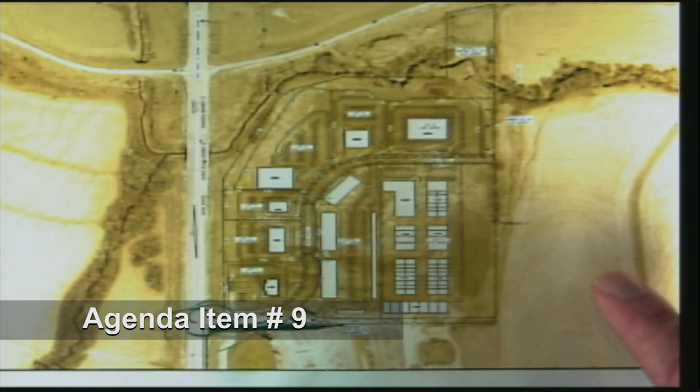As we understand it, Mr. Lanahaw's property will be single family back here. We don't know what Rock Place's future will hold. As we've said, it's a 165-acre mixed-use corner, so it could be commercial in nature.

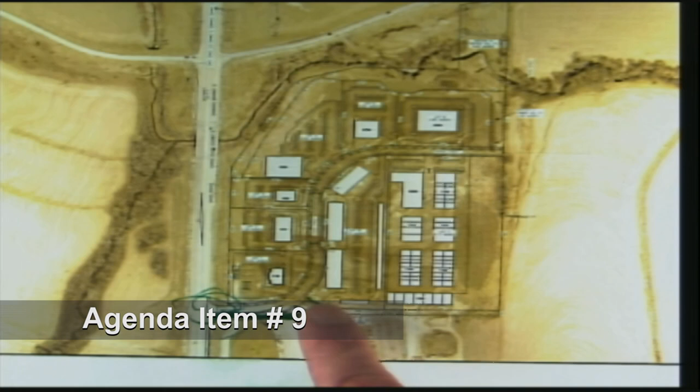But it would seem for us to function better for this to flow into our subdivision with the most traffic coming in here. We did set up this intersection so it would work with semi-truck traffic, and if we need to widen this radius for the right-hand turn back into their property, we're happy to do that. The traffic engineer and our engineer designed this movement to handle semi-truck traffic, with enough turning radius, and the median is placed so trucks going out would handle that curve.

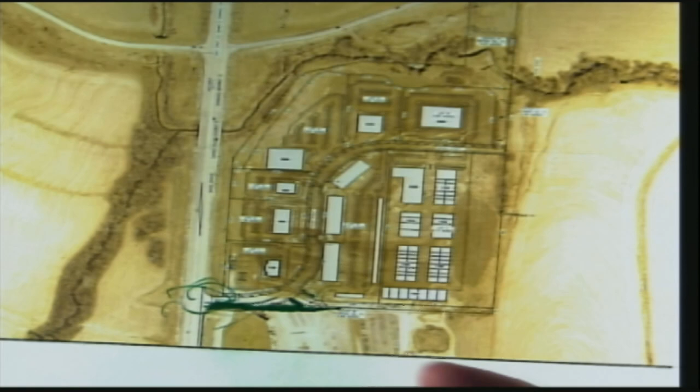Even if you brought this back here, this would be a public right-of-way, and Rock Place would have to access somewhere onto it. You couldn't take something directly back into their property. It would have to come off with a proper driveway intersection back into their property, if that makes sense. Will you continue to work with them and come up with a solution? Yes, we'd be happy to work with them.

Okay, any other comments or questions from the board? The public hearing was closed. We'll hear from Eric with the City of Omaha.

I don't think I need to touch on any of the access issues. I believe those have been adequately discussed, and we have common preliminary plat conditions regarding those. It's been mentioned that the intersection of 204th and West Center Road is our largest mixed-use area, up to 165 acres available for office and commercial. I want to point out the northwest corner of the intersection accounts for about 15 and a half mixed-use acres. So, subject to an acceptable mixed-use plan, the rezoning from AG to MU would be consistent with the future land use element of the city's master plan.

The department is recommending approval of the rezoning from AG to MU, subject to submittal of an acceptable mixed-use district development agreement prior to forwarding the request to City Council, and approval of the preliminary plat subject to the 18 conditions listed in your report, with or prior to submittal of a final plat.

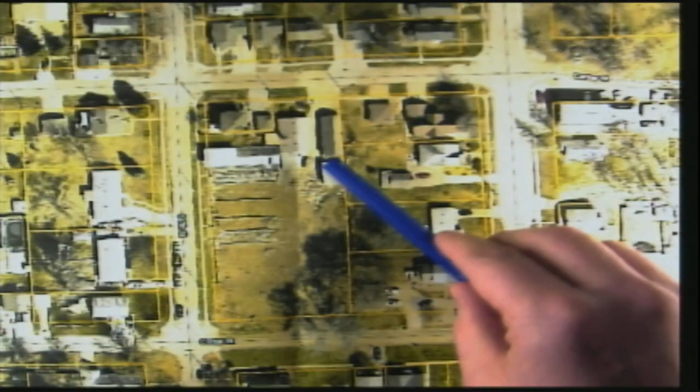So site conditions here, just real quick. This is our site, just over a 1 acre site. There's one single family residence that's remaining here. Otherwise, this was a former florist. It's now been demolished, and there's some geotech and other conditions we're working through.

In our opinion, this is your quintessential urban infill redevelopment. Utilization of the PUD due to site constraints is obviously the planning vehicle being utilized here to deal with some of the size constraints, side setbacks, that sort of thing.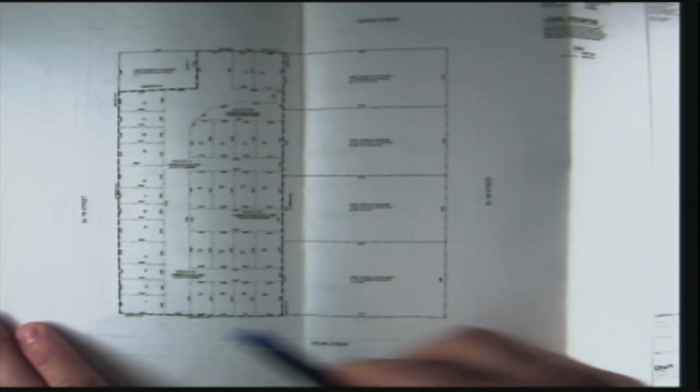Some of the big public improvements we wanted to touch on - I don't want to rehash what was brought up in TIF - but Cedar Street, the street to the south, is currently gravel. In connection with our redevelopment of this entire parcel, we'll be repaving Cedar Street, with sidewalks, landscaping, and lighting. The same will be true for sidewalks and landscaping along South 7th, and the same is true with respect to Center Street.

Currently this property is zoned GC, so there could be some pretty intense uses that could go on. Based upon the existing zoning, obviously we're not going to do that - we're going to rezone to R7 with the PUD overlay.

With that, I can present just a couple of elevations. One of the things we're subject to here is obviously the urban design guidelines, so in working with the city, these sorts of materials have to be approved by the urban design team. Based upon the pre-application meetings, where we are today the city has signed off on a lot of these elevations. So this is just giving you an overview of what's being proposed here.

So with that, I don't mean to hurry through it, but I know you heard a lot of it with the TIF application. We're here for any questions. Appreciate the board's consideration.

Okay. Are there any other proponents? Are there any opponents that wish to speak? If you're planning on speaking, you can come down and take a seat right in the front, and then you can take your turn - make sure you give your name and address.

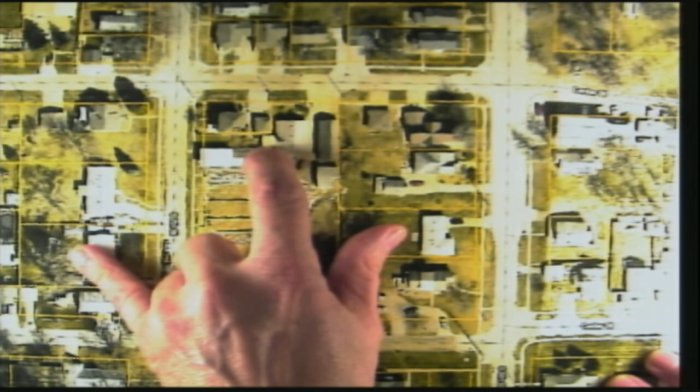My home, according to my neighbors, used to be part of that property when it was a florist shop - a family florist home. It was sold out of the family. So my property line is actually the house right here. This will be my garage, driveway, and this is my home.

The idea of the property developer is to construct the first unit here 5 feet from my property line. My property line is my house. 5 feet is essentially this desk.

Currently I've got views from the kitchen, the bathroom, and the upstairs bedroom of a view that has been helpful - it previously was a nice florist shop with greenhouses when I first bought the house. I've lived in that house half my life now, and you had a good view. Now, if you build this structure 5 feet from my property line, that's what I'll be looking out at from my bedroom, from my kitchen. When I'm doing the dishes, this is what I'll see - a blank wall, literally arm's distance from my window.

I would like to see the first unit set back ideally 15 to 20 feet. It's going to be a 3-story development, and I'm going to get zero sunlight, zero airflow as proposed. Having it come back 15 to 20 feet, I'd be able to have some view, even if it's a diagonal view. I'd have some sunlight, and we'd be able to have a little bit more airflow.

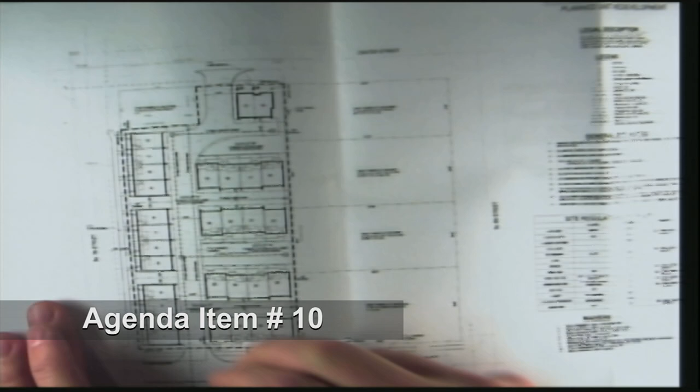And so we're already restricting the 40-foot width down to 19.5 feet. And we're somewhat constrained by the fact that we have to have these 2 access points per the development requirements. So in a perfect world, we'd have another 30 feet down here that we could shift everything to the south to be a little bit more mindful of where this house is built in relation to its property line. But again, we're at 7th and Cedar. It's an urban infill area. We try to work as best as we can.

With respect to the meetings, we've had 2 neighborhood meetings, of which we sent out notices to all neighbors within 300 feet. We had a meeting in February, and we had a follow-up meeting in March. Both of those meetings, I was not there, but Mr. Catt was there, were well received. I think Ben took a lot of the input, especially with respect to the design of the row homes, into account. I would say for certain that it appears that the Dahlman Rose Homeowners Association is very active.

And it shows because they have a very vibrant neighborhood that a lot of folks want to be into. So I think going forward, obviously Ben and his development team should reach out to them, continue the dialogue, make sure they're going to be good neighbors and representatives of this neighborhood. So with that said, hopefully I addressed most of those questions, but happy to further opine if need be.

Where were those meetings held? Those were at 35th and Center. I think that's where Ben has his offices. So it's kind of hard to find an area down here that's open to the public that folks can come. Picking that location was nothing more than that's just where Ben works.

And so I would say, maybe Ben can come down here. I think the first time there was 5 to 10 people there. The second meeting there was about 14 people there. So folks did get the notices. They did show up, and again, from our standpoint, they were well received.

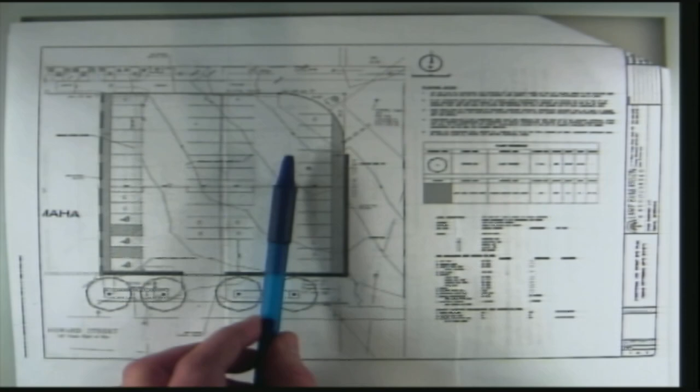So I put on here just the drawing or the site plan. I think that you all probably saw this earlier today, but just to orient what the project is. Currently, the parking lot that's generally shown here is in existence. It's in maybe questionable shape right now, or at least could use some freshening up, which is what the Omaha Performing Arts is trying to do this summer.

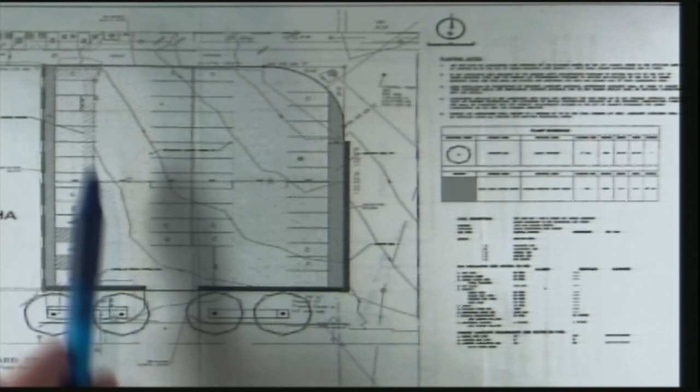In addition, where these are shown, currently there's a building that the Performing Arts will be taking down in short order as part of this project, and expanding the parking lot and adding 10 parking stalls.

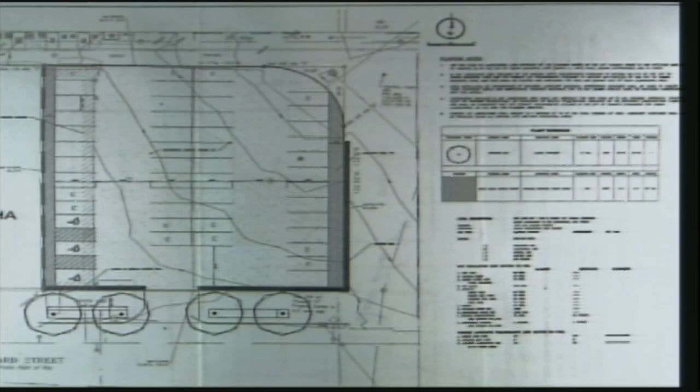The other piece of this that will be happening this summer that we're in coordination with the city is to improve the asphalt in the alleyway that connects 16th Street to this parking lot and goes behind the parking garage that's right here. So that's not part of what's before you today, but that's part of the total improvement project that we're trying to complete this summer.

The three concerns that the city has raised, and that we believe we have either already worked through and/or are in the process of working through, can be handled without a layover today.

The first one the city raised is to provide for a newly constructed screen wall. There's a non-compliant screen wall running along Howard and 15th Street. It's dilapidated, needs to be improved, and brought up to code. That's part of our request, as we're also trying to be in front of the ZBA, the zoning board of appeals, hopefully to hear and approve our requests for waivers regarding a green parking lot and those code requirements.

When you say 14th, what, May 14th or April 14th? April 14th. Is that right, or is it the 12th? I'm sorry, it's the 12th. Take that back—April 12th.

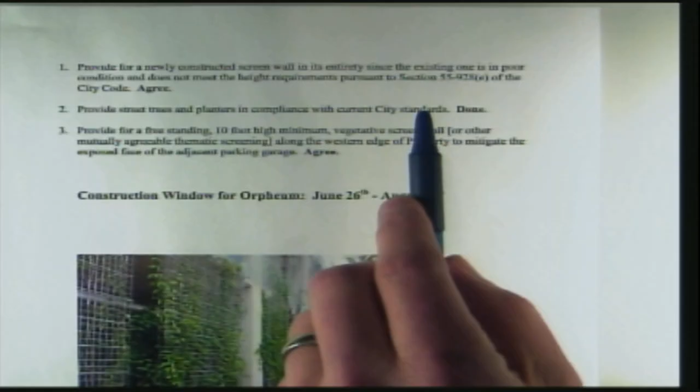So this wall has to comply with section 55-928E. We understand that and are absolutely in agreement that we will submit plans that are compliant. We've already had discussions with the city—they actually sent us a representative wall they think might be good for us to look at, maybe implement for our wall here. But our wall will need to comply with city code, and when we submit that plan, that's the ability for the city to comment.

The second issue raised is that the original tree planters in our submitted site plan were not compliant with an updated, revised street planter standard. So we resubmitted a plan on Monday after we got that information. That's now with the city. We will absolutely put in planters that are compliant with city code, and in our mind that's already accomplished.

Lastly, there's an issue raised by the city regarding—let me move this and put it right back up—when we take down this building, it will expose the east side of the parking garage directly to the west of the building. I'm told, and I believe it to be true, that wall was not designed to be viewed because it was going to be right behind a wall. So some of the aesthetics on the south and west sides of that parking garage are not on the east side. The city's request was that Omaha Performing Arts do something to provide more screening.

What's been suggested, as you'll see, is at a minimum a 10-foot high vegetative screen wall, which the city proposed or sent a picture of a representative vegetative screen wall to help us understand what that means, since I wasn't familiar with the term before. In their comments they made clear this example happens to be attached to the garage—we don't own the garage, but we'd be willing to have conversations if the garage owner would allow us to attach something like that. Otherwise, we could do a freestanding vegetative wall.

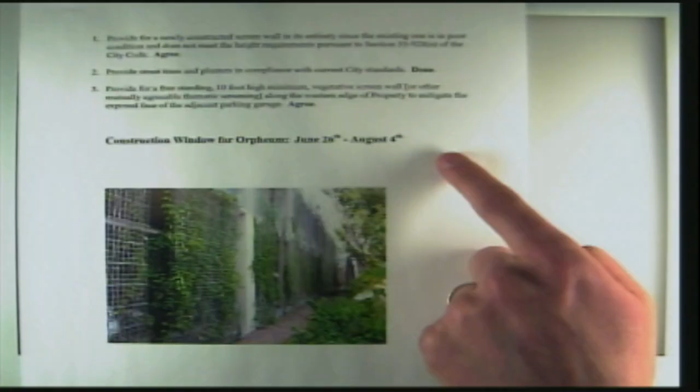I put up this construction window so everyone knows what the Orpheum and Omaha Performing Arts are trying to accomplish. From June 26th until August 4th, the Orpheum will be closed for interior capital improvements, and that's the timing we're trying to coordinate with these exterior improvements. Next year will be the biggest season for the Orpheum ever.

It includes among a whole host of really terrific performances, Hamilton, and so we're really trying to get as much of this accomplished as we can, and we absolutely want to and will comply with the Omaha requirements. I think that without laying us over, we can still accomplish all three of these concerns. We're willing to agree to them as conditions of approval for the conditional use permit, and to work cooperatively with the city to accomplish those three items as a condition to receive the building permit we would otherwise need. So I do think there are some checks the city would otherwise have without laying us over at this meeting. I'm sure you want me to talk for another 15 to 20 minutes, but I'll sit down and let you go.

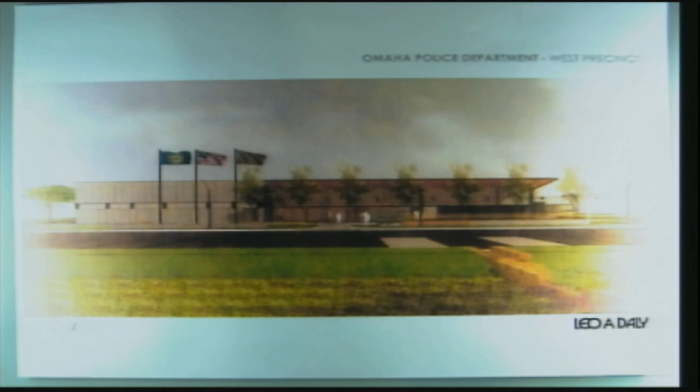I'm showing the front elevation here that was submitted to the Urban Design Review Board. The idea is to make the front a publicly accessible, welcoming space. There's a lot of glass shown, as well as landscaping and a plaza space, and then a parking field in front.

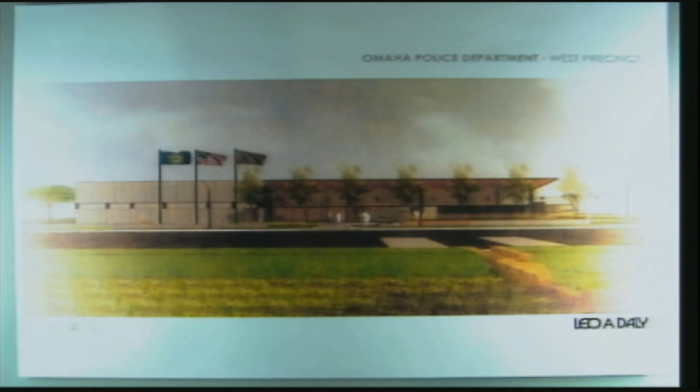The facility will operate 24 hours a day, 7 days a week, and will employ 22 patrol staff per shift for 3 shifts. It will also house 3 full-time emergency response unit employees, 30 SWAT employees, and 25 traffic officers.

I'll show the site plan here. This is along Cumberland Drive. North is facing left on your screen. The Mark is located to the east, and there are some smaller industrial flex office buildings to the west. There are 2 shared access drives here and here that straddle the property lines, and this facility will utilize those access points.

This is the front publicly accessible parking space with the plaza, and the rear lot will be gated, where the officers will access that lot with a secured entrance. There will be fencing on all sides around that, on the northeast and west sides.

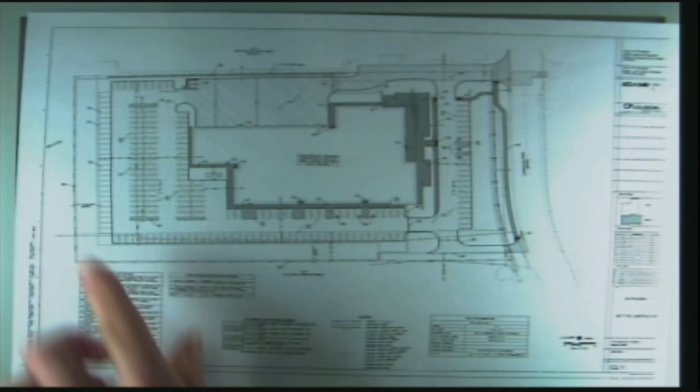Oh, this? Yeah, those are parking stalls that may or may not be included, depending on how things come in with the construction budget. We're including it as an add alternate, that's why it's shaded in there. They look shallower than the others, but that's okay.

Your fencing material, you said you're still working on that. Are you down to just a couple different decisions, or looking at a cyclone fence, a wrought iron fence? We're looking at a few different options. On the east side it needs to be opaque to screen it from the Mark, so we haven't determined exactly what that material will be. But we want it to be nice looking, to complement the building and be acceptable to the neighbors, but also do the job of shielding the view.

Any other questions? Perfect. Any other proponents that wish to speak? Come on down, sir. Hi, my name is Todd Engel at 14747 California Street.